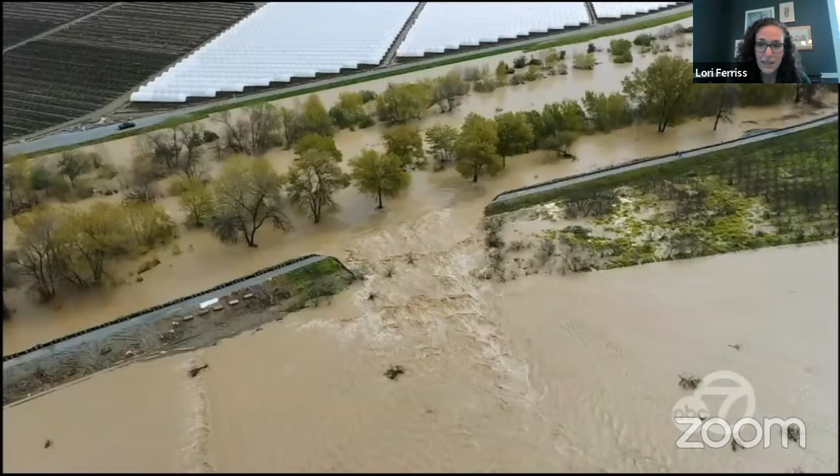We've used engineering solutions like levees, which we know have failed over and over again, leading to severe loss of life and property. But flooding, this relationship of living in a place with hurricanes, living in a place in the flood zone, adjacent to rivers, adjacent to the bayou, this was just part of life. And it was kind of an understood relationship with the culture, and the sense of place and the sense of identity was tied to the sense of the natural environment around you. And this is the architecture that came out of that relationship.

We traveled a lot, and I've always just been fascinated by the way that we build our spaces around us, and the way that these spaces that we construct talk about who the people were who built them, when they lived, what was available to them. So for example, Mesa Verde, a very different architecture from that of Louisiana, but understanding how the Native Americans there used the mountains and the cliffs and the earth around them to build these structures that have thermal mass and are protected from the heat and the sun of the desert.

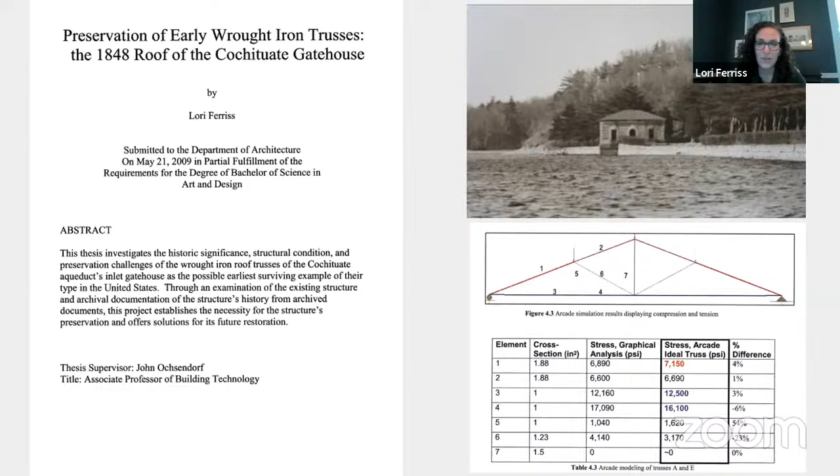So I went from my architecture degree into a master's of structural engineering, where ironically, I wrote my thesis about sustainability as a lead for historic preservation. So I got my engineering thesis done in my architecture degree. I came back and I really wanted to focus on inherently sustainable features and understanding how the way that the design industry of the time recognized sustainable design was sort of divergent from concepts of preservation, even though we know that preservation and most historical buildings, especially those constructed before the Industrial Revolution, are inherently better performing than most of what we build today.

So from there, I really wanted to focus on preservation and really just get my hands on old buildings and historically significant buildings. So I went to work for Silman, which is an amazing company. Bob Silman was truly a leader and, oh, my slides are auto advancing. At the vanguard of preservation engineering.

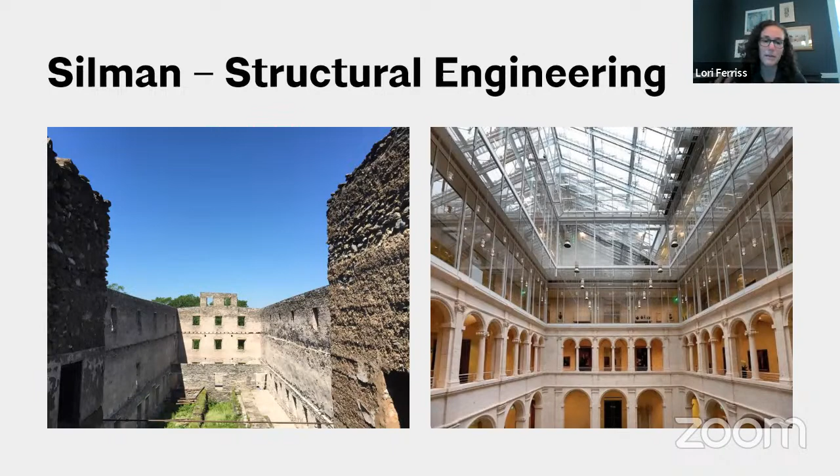So I got to work with structures like stabilizing the ruins at this Quaker barn on the left, all the way to really high touch buildings like the Renzo Piano renovation to the Harvard Art Museums, and understand how existing buildings perform, how historic materials perform, and how we can intervene to stabilize them, to modernize them, but really getting to understand what we already have.

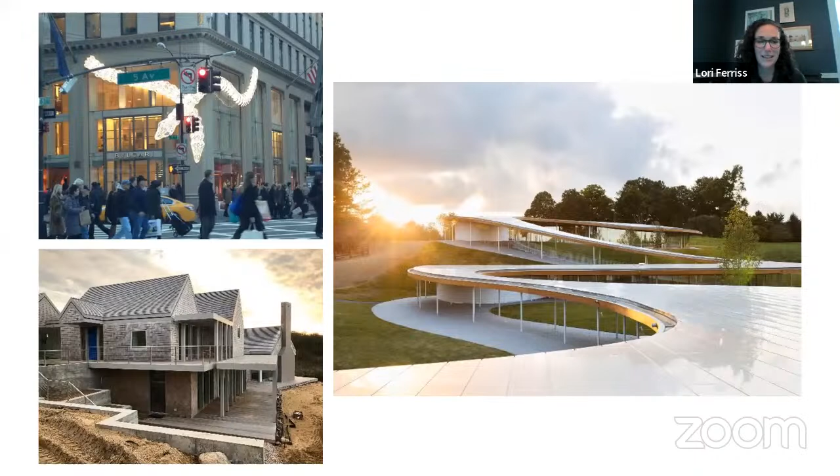I did a wide range of work at Silman, not just historic buildings, but also new construction like the Grace Farms complex by SANAA on the right. I did some high-end residential, which is totally different. And then things like, for example, these Christmas lights displays on historic facades in Manhattan. So I really had to experience quite a range.

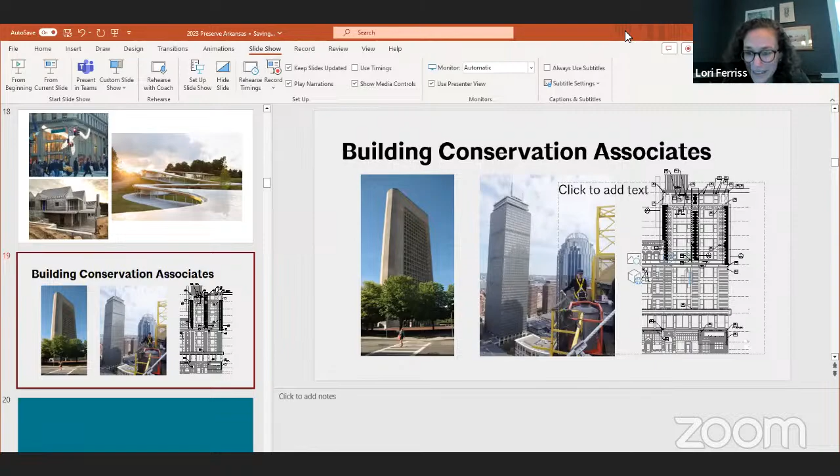Sorry, I'm gonna have to turn off my timings. Sorry about that. I don't know why that's happening. Okay, sorry. Back to the show.

So from Silman, as you saw, I was doing this wide range, and what I really, really wanted to do was preservation. I wanted to do all preservation. So I moved over to Building Conservation Associates, which does only that. They work on historic buildings, recommending treatments, recommending preservation approaches, guidelines, and really doing some innovative work. So in that job, I worked on things ranging from the Boston Custom House to this tower on the left, which is 177 Huntington Ave in Boston.

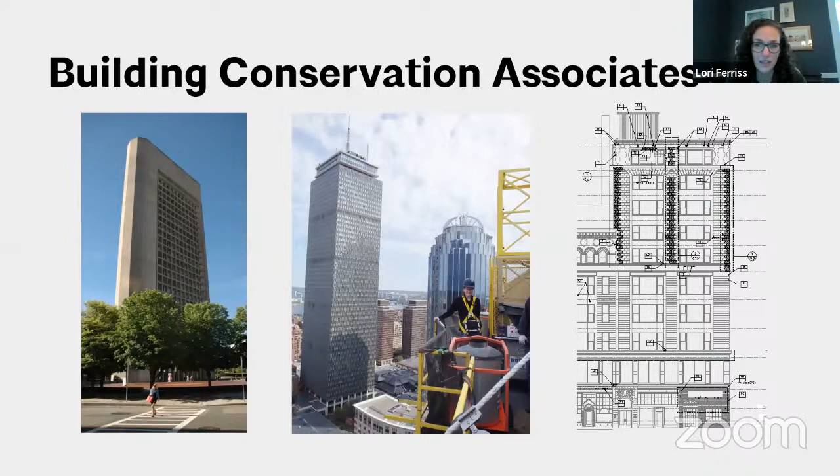It's the tower designed by I.M. Pei as part of the Christian Science Plaza here. In the middle, you can see me standing on the mast climber 300 feet up in the air. I'm really scared of heights. So it turns out that this was not the job for me, spending most of my time doing hands-on survey and hands-on construction monitoring on historic buildings. But I did get to experience a lot of the really important heritage that we have in Boston. And what I learned from this is that, well, I'm gonna get to that in a minute.

One project I worked on at Building Conservation Associates, the last big project that was really, I think, impactful to my direction, was a small consulting job to support the first Keeping History Above Water conference in Newport, Rhode Island. For those of you who aren't familiar with Keeping History Above Water, it's been an amazing effort that is all about rising sea levels, extreme rain events, and what that means for our built heritage.

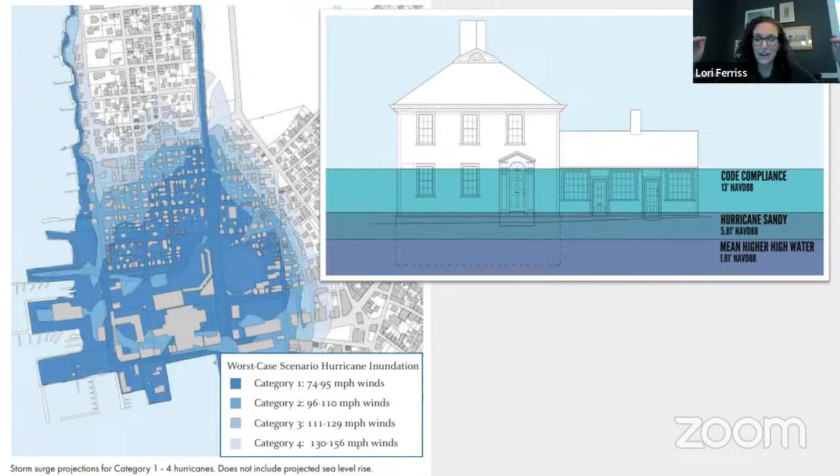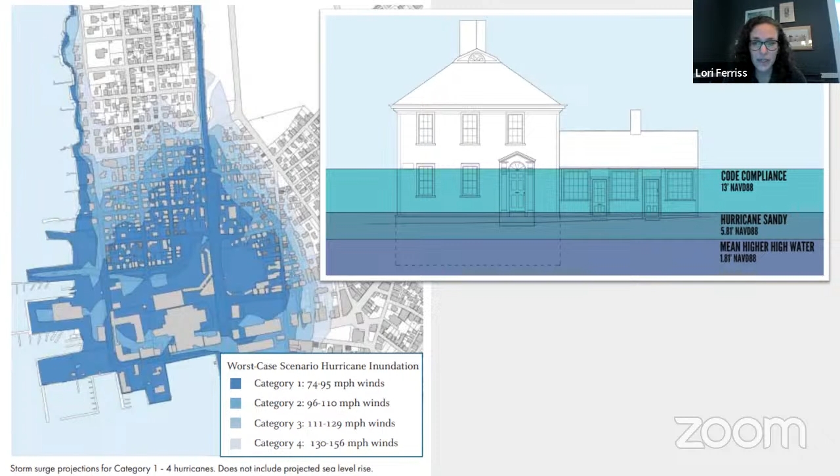And then code compliance, this 13-foot NAVD is FEMA's requirement. And so you can see that in order for this building to be FEMA compliant, you would have to elevate it almost an entire story. So this obviously raises huge preservation questions around authenticity and reversibility and how we address resilience in buildings like this.

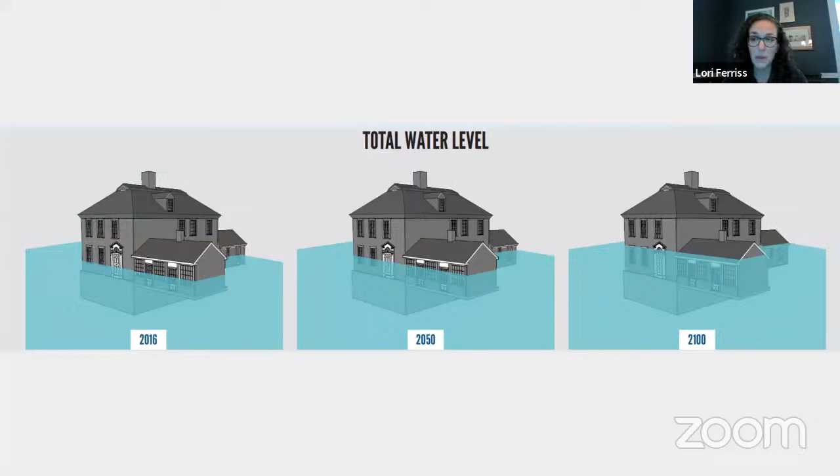So you can see that this is really a problem, that in order to preserve these buildings, they have to change. We can't think about preservation as just keeping them the way they were, because they will disappear if we do that. So we explored a number of approaches to flood proof, and really we were focused because of this uncertainty in the long term, and the fact that the building scale interventions really have to be paired with utility scale interventions. What's the city going to be doing about managing floodwaters? Are there going to be barriers? How are they going to make sure that water drains away from these streets, et cetera?

So we focused on near-term solutions that were appropriate, we felt, for the heritage, which included filling the basement, ventilating the crawl space so that you could have wet floodproofing so that water that came through could dry out without damaging the building. And in fact, wet floodproofing highlights the inherent resilience benefits of historic buildings, because these buildings were made with lime plaster and wood, wood that can absorb and dry out a few times without being too deteriorated. These materials are actually more resilient to flooding than what we would put in now, like drywall, which would have to be ripped out.

We did the basic easy things like grading, and we did talk about elevation because the wing, the kitchen addition to the house, which is not original, is even lower than the main house. So we talked about lifting that part of the house up because it was the most vulnerable.

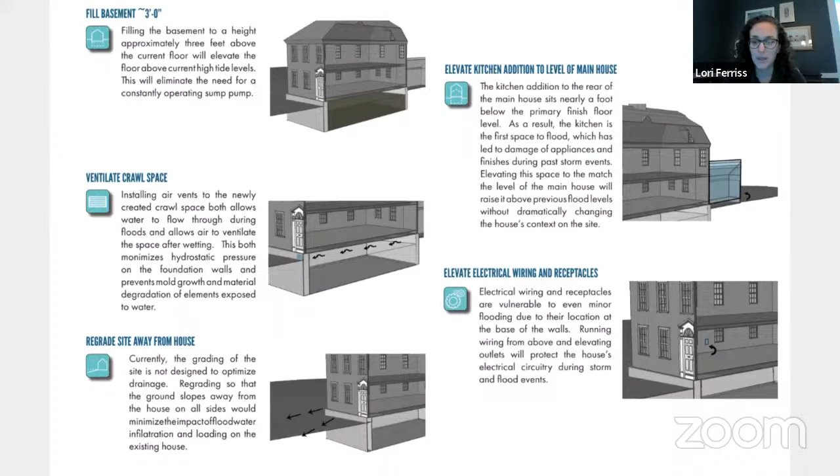And what we ended up doing was recommending this whole combination of strategies as a near-term, mostly reversible impact approach to the building. Elevation is a really dramatic intervention, and it's hard to know how to take a really big intervention when you don't know what the codes will be, what the projections will be for flooding. So we decided on a more minimal intervention to start with that will protect the building until there are more knowns at the municipal and the neighborhood scale and related to insurance.

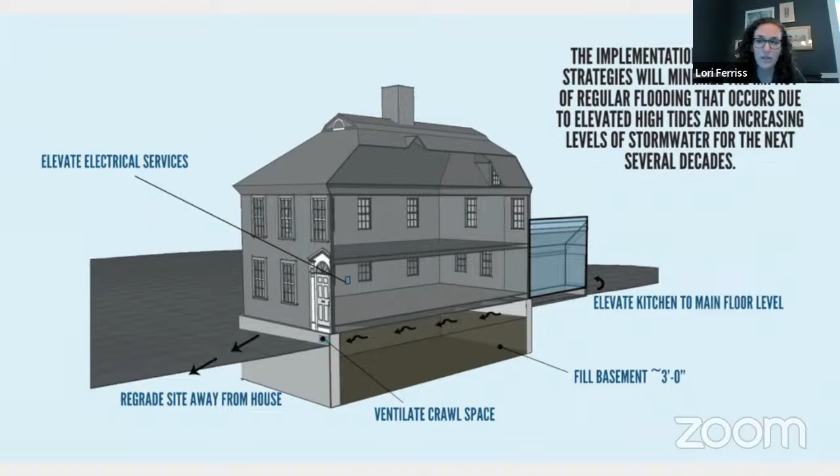So this project got me really excited about how our historic buildings are going to face the changing climate around us. And I realized that I wanted to do more of this. I didn't just want to conserve buildings. I really wanted to understand how we're going to use them in the future, how they're going to remain viable, how they're going to remain functional and durable. And so that brought me back to architecture, where I could really have a more holistic view of the work I was doing. And I came to Goody Clancy to work with Jean Carroon, who would be mortified to see her picture in my slides.

But Jean Carroon, for those of you who don't know, is a real pioneer of sustainable preservation. She wrote the book Sustainable Preservation, and has been at the forefront for decades, talking about how inherently sustainable our existing buildings are and how imperative it is that we reuse them.

So that was really exciting for me to just kind of experience a whole breadth of buildings, and not just how we preserve them, but why we preserve them and what's going in them and who's going to use them and how are they maintaining them and all these other questions.

So I'm going to pause here because what really motivated my next stage of growth was this concept that building reuse is climate action. I'm going to do a little technical diversion. I'll try not to be too nerdy about it.

But just to backtrack on this concept, going back to the Paris Agreement of 2015, the parties of the world agreed that in order to avert the worst of global warming, we needed to cap global temperature rise to somewhere between 1.5 and 2 degrees Celsius. So that was the commitment made at the Paris Agreement.

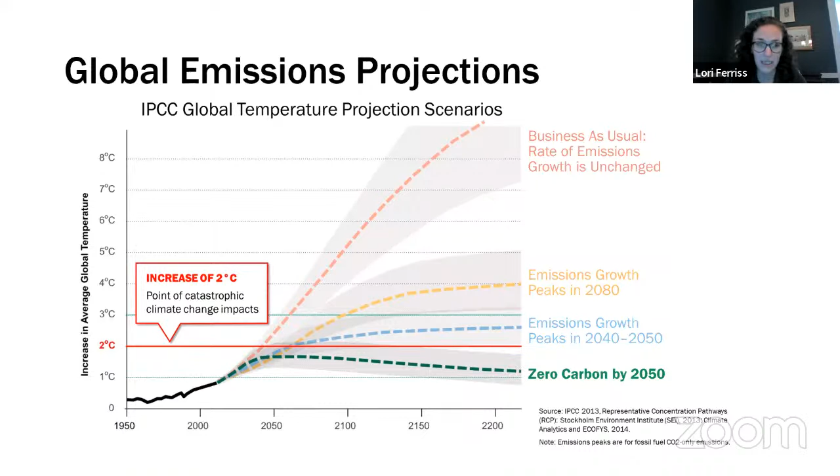And so when we think about what this means tactically, we have a carbon budget, and in order to meet that carbon budget, we need to reduce our emissions by at least 50 to 65% by the year 2030. So again, this is not looking at the lifespan of a building, it's looking at right now in the next decade. And we know that buildings are responsible for a huge percentage of emissions. Globally, that's about 40%. In urban areas like where I am in Boston, it's closer to 70% of our emissions coming from buildings.

But of those emissions from buildings, about 28% are from operating buildings. So this is heating, cooling, lighting, plug loads, whatever it takes to run a building. Those are the operational emissions. And these are coming from existing buildings that are using energy. The other 11% are what we call embodied carbon emissions.

And those embodied emissions are essentially environmental impact that results from extracting materials, mining them, bringing them to a manufacturing facility, processing them, transporting them to a construction site, and then building a building. And then what happens at the end of life is it's demolished and sent to a landfill. So this is the other 11%, and that's mostly new construction.

And so when we talk about reusing buildings and the positive impact that can have, it's really a double whammy, because we can both reduce the operational emissions by making buildings more efficient, and we can reduce the embodied emissions by avoiding all the material that goes into new construction.

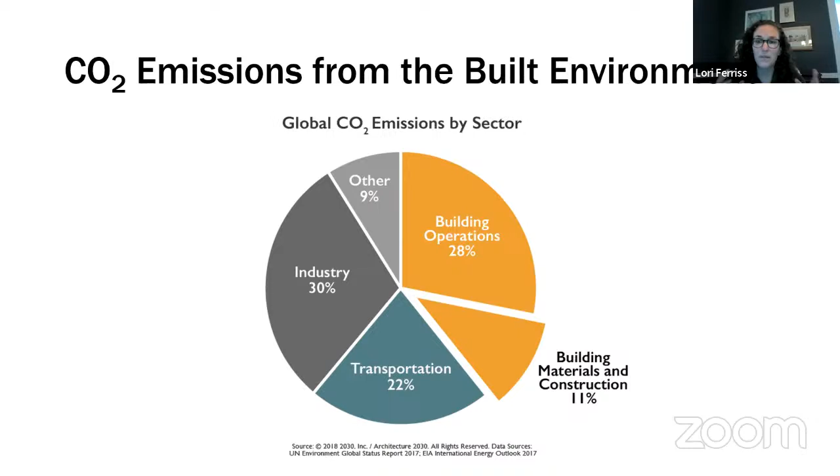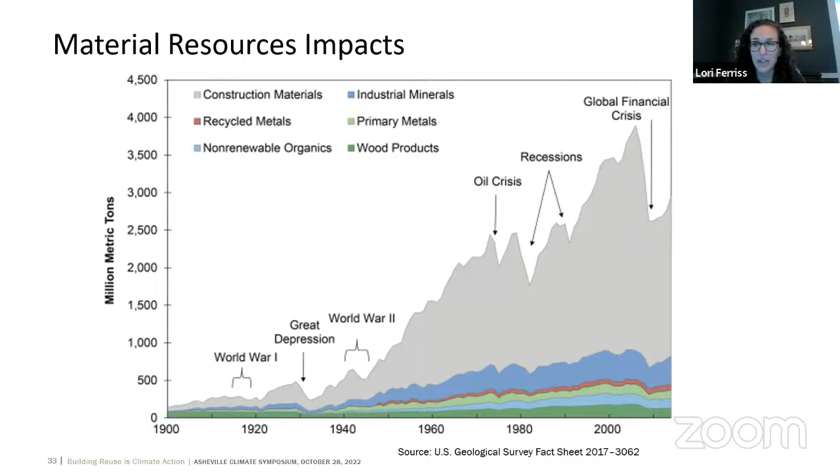And I'm going to talk a lot about carbon because it's the metric that people typically use, but there are obviously many, many impacts to material use. For example, material resource extraction is the primary cause of biodiversity loss. And here in the United States, 75% of our raw material extraction feeds the construction industry. So it's really non-negligible.

And we also know, as we saw from 74 Bridge Street, and as we see all around us, that with our heritage, it's not just what benefit can our heritage offer in terms of climate mitigation, but it's also how vulnerable is our built heritage. We know that we're already losing historic places to climate change now.

So the way that climate change is addressed is through climate action. And the term climate action officially, according to the UN, has 3 prongs. It means mitigating environmental impacts, so reducing our footprint on the environment; adapting to our environmental changes, becoming more resilient; and thirdly, building knowledge and capacity around climate change so that everyone is able to do steps 1 and 2.

And we know that existing buildings have a huge role to play in this. Just between now and 2060, the world is projected to double our existing building stock, which is essentially building a Manhattan every month between now and 2060, which is sort of horrifying. Most of that's going to happen in the global south.

But we also know that by retrofitting existing buildings, we can reduce the embodied carbon of construction by 70 to 85%. So this is a real opportunity for advocacy and a real opportunity for existing buildings to contribute positively. And of course, because this is a preservation group, we know it's by no means just about carbon, that the real benefits are in the co-benefits of existing building reuse and heritage reuse.

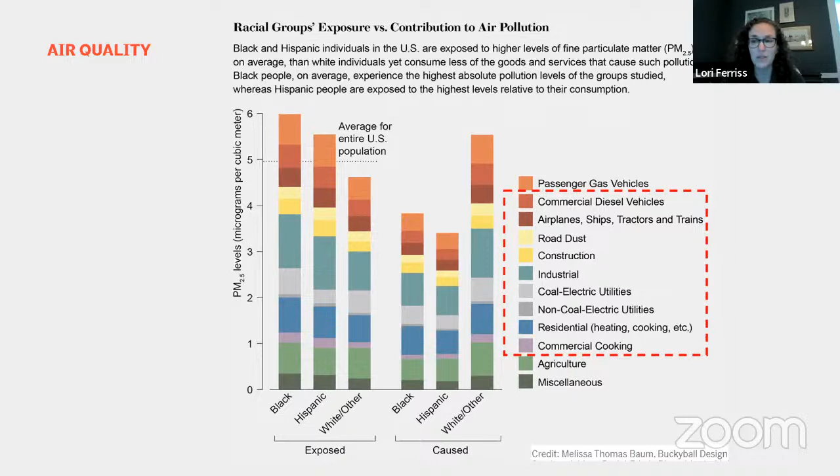So again, our work as preservationists, as architects, whatever way you work in buildings, has a huge impact on the communities and people all the way up the supply chain, whether you see that directly in your project or not. We also know that demolition is really bad for people in low-income communities. That's where the landfill goes, and that's where the air pollution is going to happen. And so we have to, again, think about retaining buildings as a way to support and make healthier some of the most vulnerable communities.

We also know that preservation results in more jobs than demolition and new construction. There are some really great facts from the PlaceEconomics reports. This one, for example, that reuse and refurbishment produces 300 jobs per 10,000 tons of waste, compared to only 1 to 6 jobs in a traditional landfilling and incineration process. So this is really good, not just for the environment and for culture, but also for local economy.

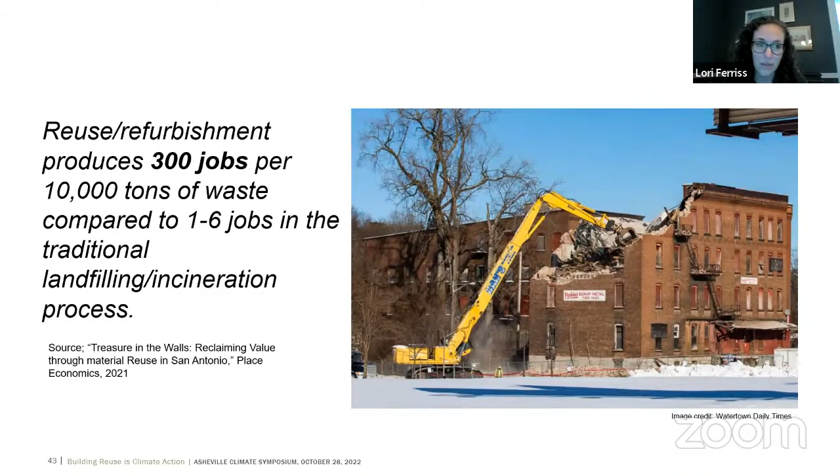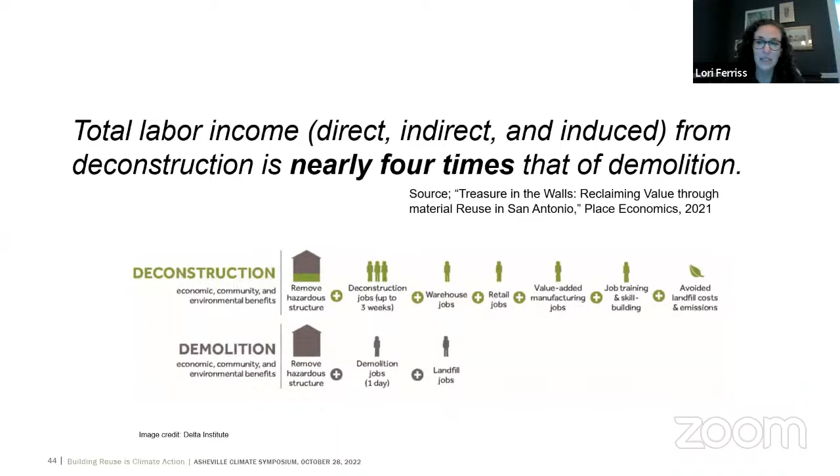Similarly, total labor income from deconstruction is nearly 4 times that of demolition. So again, when you study it, it's shown over and over that reusing existing buildings, restoring them, salvaging historic materials is better for the economy, and especially better for the local scaled economy.

And again, I think there's often a perception, at least in Boston where I am, I know in many urban environments, that preservation is sort of an elite concept and that only wealthy people benefit from historic buildings and that that's who they're for, but that's in fact not true at all. And if we look in Boston, you can see on the left our vulnerability mapping based on race and income and age and language availability, et cetera. And on the right, you see the historic districts, and you see the almost direct correlation between the two.

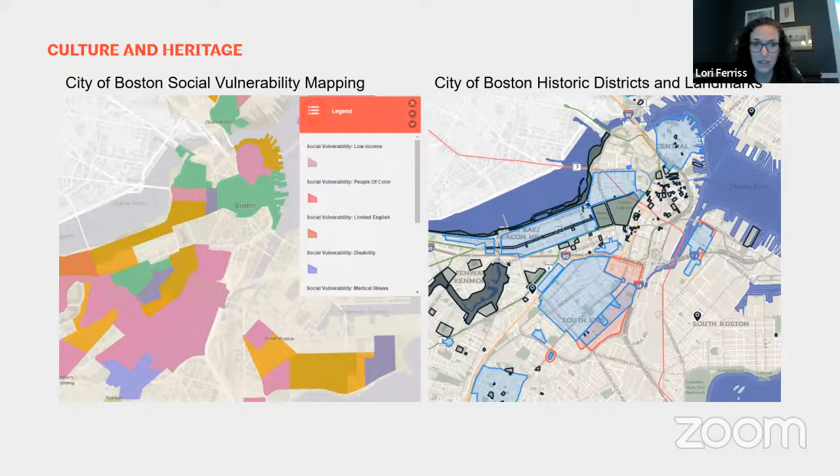So really preserving and taking care of, stewarding historic places is social justice and does promote social equity. And again, going back to this idea of loss and resilience, we know that we're already losing a lot of land, of buildings, of places, and the people on the front lines tend to be more vulnerable communities. And so that is where we need to figure this out. We need to figure it out for those people, and because it's really coming everywhere.

So with that, in order to really think about how I could help make this argument of how important existing buildings are, I started implementing life cycle assessment in my work. So I first did this in graduate school, but I came back to it when I went to Goody Clancy to be an architect.

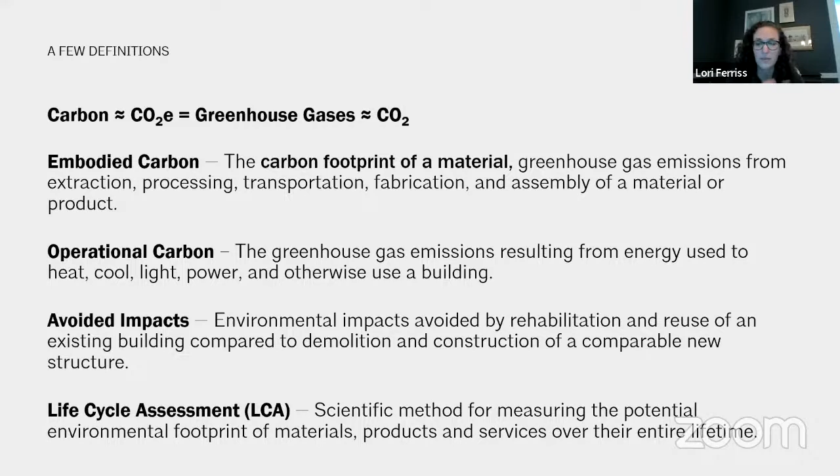And just to make sure we're all speaking the same language here, a few words of terminology. So embodied carbon, again, is that footprint of material manufacturing, transportation, et cetera. Operational carbon is the energy we use to operate buildings. Avoided impacts are the environmental impacts that we avoid by reuse compared to new construction. And then life cycle assessment is a scientific methodology that measures the footprint of materials from cradle to grave over their entire life.

So I wanted to apply this to preservation projects, both for decision-making and to really advocate for building reuse. So for example, this is a campus building I worked on, it was a study where we were looking at exterior restoration and systems upgrades and envelope upgrades. And so I wanted to understand, is spray foaming this building really the best thing to do for it?

So, we looked at insulation options, and this is where I started to look at this concept of carbon payback, which is if you have to spend a certain amount of embodied carbon in order to make a building more efficient, when does that investment pay off? If you think about it in financial terms, when does that upfront environmental investment pay back over time?

So in this case, we looked at an insulated exterior render. We looked at filling the cavity with cellulose, which actually stores carbon because it's made of a biogenic material, or filling the cavity with spray foam. What we found is that the carbon payback was pretty good for every scenario, because we're in New England and this building was uninsulated. Any insulation was very good.

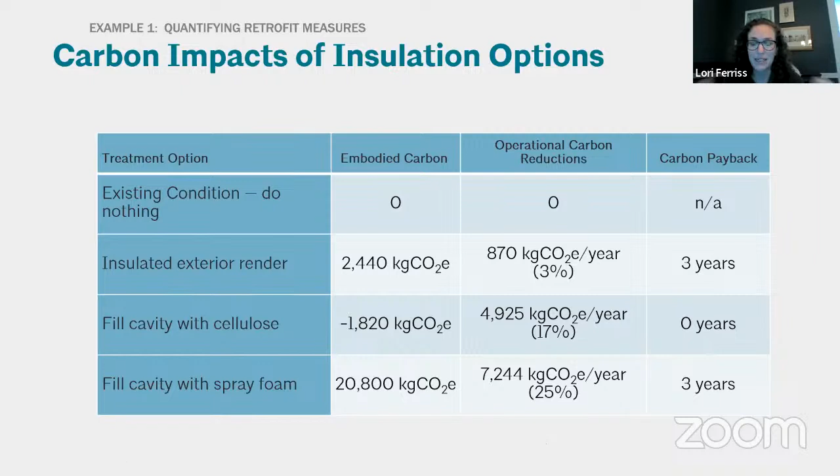But what we see is this pretty big difference in embodied carbon, and especially with cellulose, where we can actually store carbon. We can draw down carbon from the atmosphere and stick it in the building and keep it there by using natural materials. So that was a big lesson for me.

How much time do I have? All right.

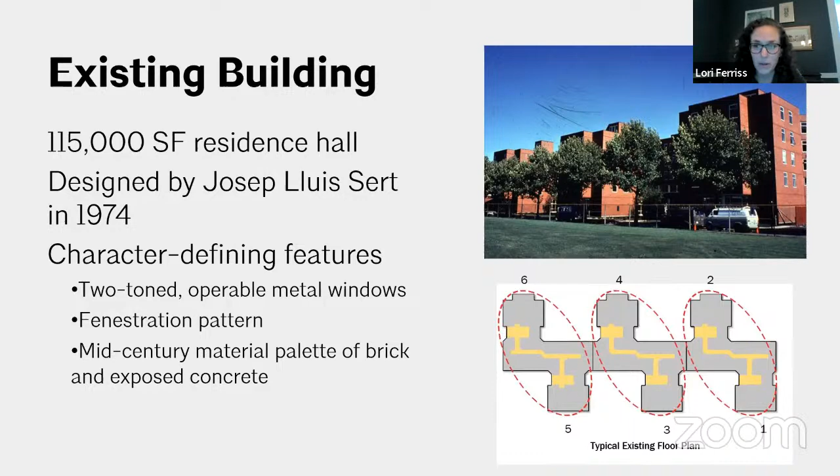I then wanted to bring this up to the whole building scale. So this is a much more modern, mid-century historic building, a residence hall designed by Sert, who was a pretty significant mid-century architect in my region. He led the Harvard Graduate School of Design for a while. And so this is a very typical architectural character for his style.

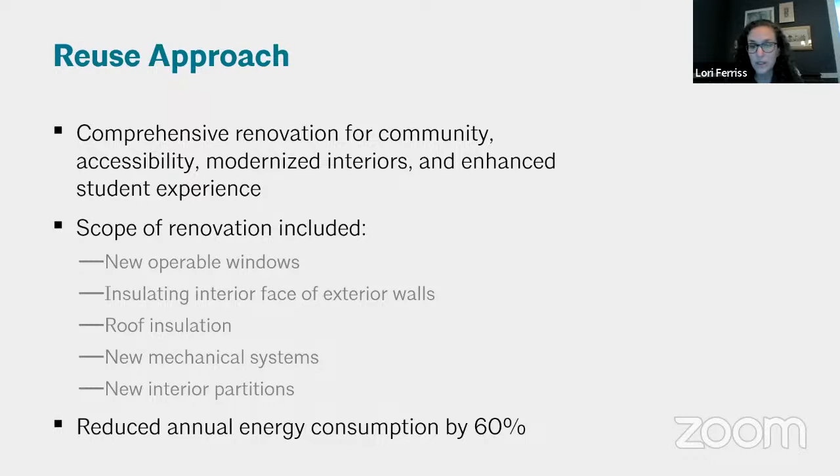And so the reuse approach for this building was a comprehensive interior renovation and modernization. We replaced all of the windows to match the historic windows. We insulated the exterior walls on the interior face, we insulated the roofs, and we put in all new systems. So we were able to reduce the energy consumption by about 60% from pre-renovation. This also included, obviously, an architectural transformation to really make sure that this building was serving the next 50 years of students.

And what I did on this was the first whole building reuse project for which I completed a whole building LCA. So this is an accounting of all of the material that we added into this building as part of the renovation, how much carbon dioxide equivalents embodied carbon resulted from that renovation. So I used a plugin to Revit called Tally and found that the entire renovation had a carbon footprint of about 780,000 kilograms of carbon dioxide.

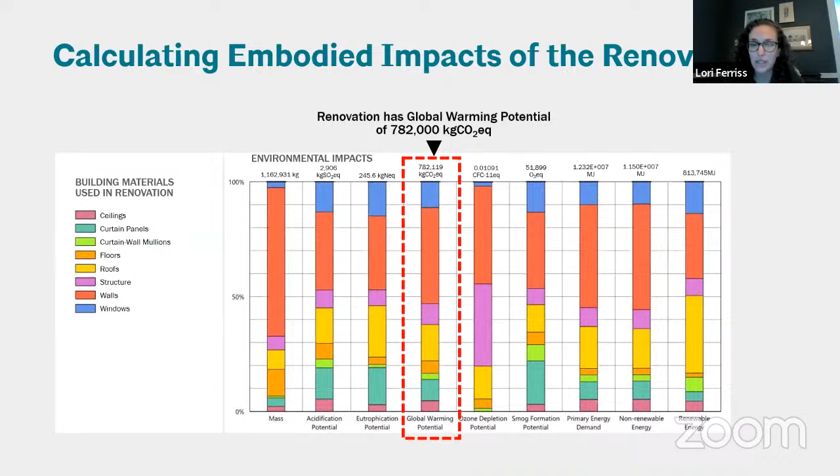And if we just look at carbon, the avoided emissions from just reusing the single building are equivalent to growing 133,000 tree seedlings for a decade, or avoiding 13 million miles driven by a passenger vehicle. So this is a pretty big number. And we also know, going back to that time value concept, that we have to reduce emissions in the near term, that one of the most important things about reusing buildings is that it reduces emissions right now in year

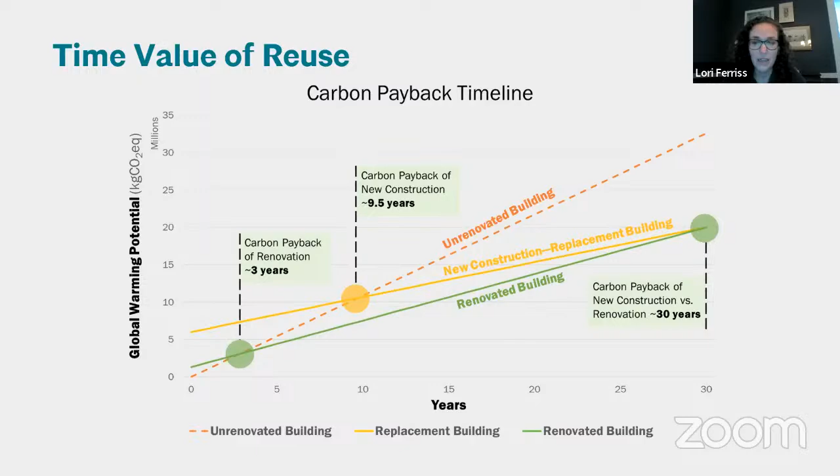You can see that the replacement has a much higher embodied carbon at year zero. It starts at a much higher point. And I gave it an additional boost of 15% energy efficiency just to see what happens. And you can see that even with that lower slope, it takes 30 years for the new construction to make carbon sense compared to that renovation. So that's too late. When we think about that timeline, it's already too late. So that's whole building LCA.

That's pretty technical. I'm going to zoom back out, give your brain some space, and talk about some of the work I do outside of my job, because I think for me, I found that this is really where I'm able to connect with my people and get work done that I think reaches more people, more buildings, and has a bigger impact than everything I'm able to do on a day-to-day. So I'm a co-chair of the APT Technical Committee on Sustainable Preservation. If you're part of APT, I highly recommend joining our community. People are doing really interesting work at this intersection between sustainability and climate and preservation.

Based on my participation in the TCSP, I'm one of the founding members of the Zero Net Carbon Collaboration for Historic and Existing Buildings, or the ZNCC. This is also a really great group. The website is znccollaboration.org. And this group is interesting because it's not just preservationists. It's a coalition of organizations, including the American Institute of Architects and Architecture 2030 and APT and ICOMOS and the RAIC and the Carbon Leadership Forum and many others who have really come together to talk cross-sectorally around this issue of leveraging the existing and historic built environment.

And that all kind of led me to the Climate Heritage Network, which is global. I'm kind of working my way out here. This is a global network at the UN level of organizations all over the world, nonprofits, public sector organizations and ministries, as well as NGOs, universities, et cetera, who are committed to mobilizing arts, culture, and heritage towards climate action. So this is the group that has allowed me to speak at venues like COP.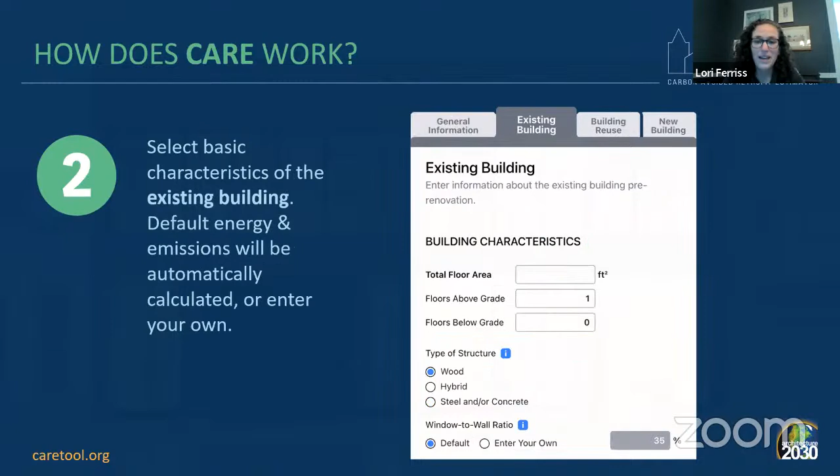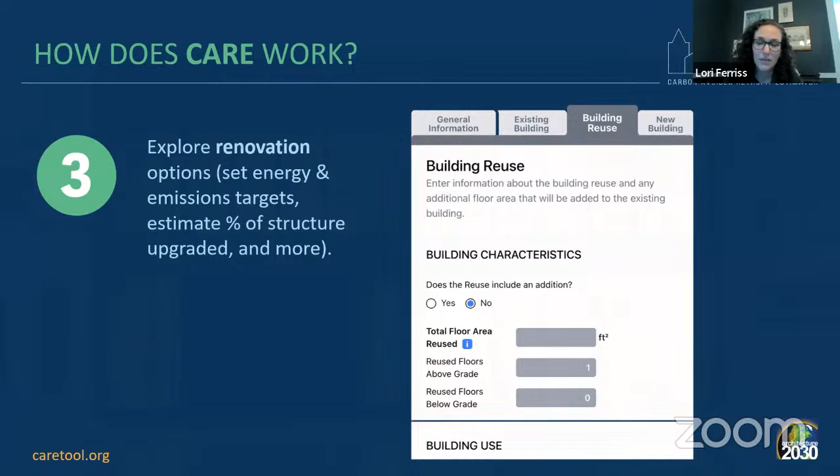And the way it works is you put in some general information about your building, you define the existing building, how big is it, what's its structural typology, et cetera. You input some factors about reuse, how energy efficient is it going to be, and how are you treating the mechanical systems, the structural systems, the envelope, and the interiors, and then what would you be replacing it with for new construction. And essentially you get two charts, one that looks at total carbon for a duration that you set, and then the other looks at those emissions over time, similar to the graph that I showed earlier. So you can say how long you want this analysis time span to be.

I'm just going to click through this quickly. It shows you the embodied and operational emissions for each scenario. And then it shows you how those play out over time so that you can make informed choices about when it makes carbon sense to reuse a building and how to reuse it. How energy efficient should it be? How does the grid impact it? A lot of different questions that we have about reuse.

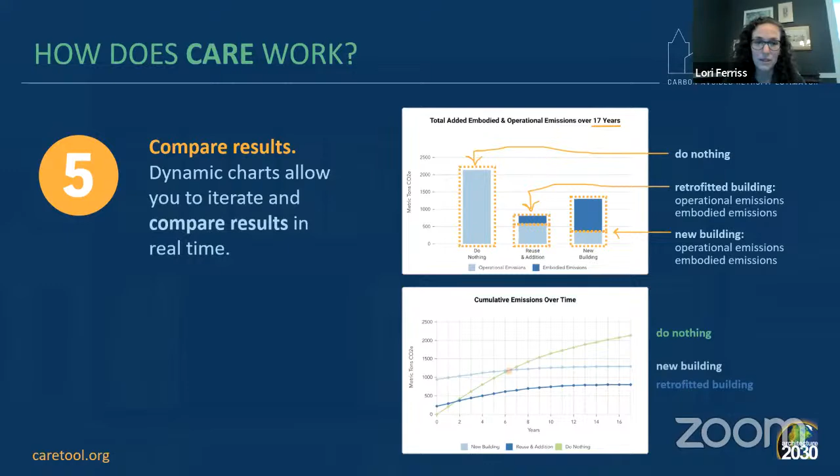So these are some of the questions it can help you answer, that simple question, how much carbon can you avoid by reusing a building? It can help you explore some of the factors that may influence that. What if you can only reduce operational emissions by 50% or by 20%? What if you're in a place with very dirty electricity? Or what if the existing building is falling down and you have to build an entire new structural system? So you can really explore all of these variables.

And you can also use it to help demonstrate the importance of building reuse in climate. For example, if you're in a municipality that has carbon neutrality targets, or you're working for a higher education institution that says, I'm going to be net zero by the year 2050. You can use this tool to say, well, reusing this building is going to get you this far towards your goal. That is not decision-making information that most people have at their hands at this moment.

So I was going to do a quick case. I'm going to breeze through this. This is my last case study, but this is a research project that I did with Agnes Scott College to use the CARE tool to look at a whole campus. So not just building by building, but really looking at historic campuses. So Agnes Scott is in a historic district outside of Atlanta, Georgia. It's a really architecturally diverse campus. And its historic buildings are really, I think, not surprisingly, fundamental to the identity of the campus and to the sense of loyalty and the sense of belonging that the students and the alumni have.

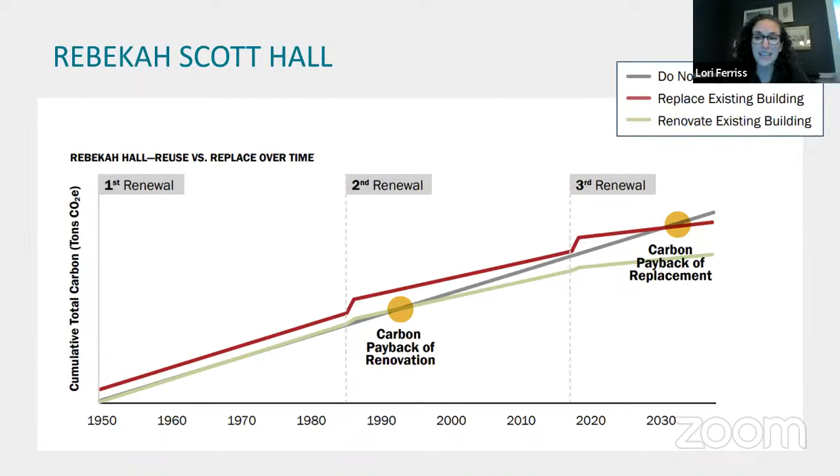And so on a typical higher education campus, that cycle is about every 40 to 50 years. So looking at one building here, you can see how that decision to renew or replace happens. In this case, they've renewed this building 3 times. And you can see the carbon savings in green of reusing compared to replacing that grows and grows the more cycles through which you choose to reinvest.

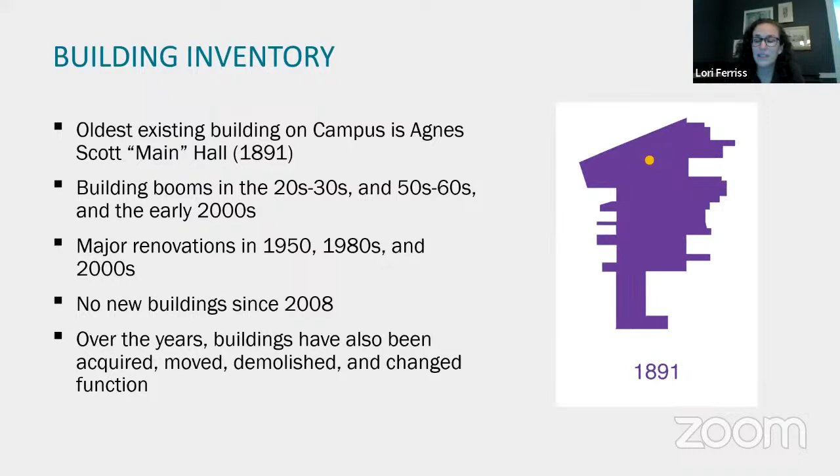So they have a pretty large range of buildings on campus, but they've mostly been built in different booms of construction in the 20s and the 50s and in the early 2000s. But they've really focused on reuse, repurposing, adaptive reuse, moving buildings. Essentially, they've reinvested rather than replaced while they've grown.

And so what this analysis was able to show is that this avoided carbon emissions equal to 34,000 metric tons historically. And if you planted their entire Arboretum campus with seedlings, it would take the entire campus 400 years to sequester that much carbon dioxide. So this is really a non-negligible number.

And then when we look at moving forward, in 2007, they committed to be carbon neutral by 2037. So if we look at just this period of 30 years, they gave themselves 3 decades essentially to get from business as usual to carbon neutral. And if we look at 3 scenarios, the first, where you just tear down every existing building and replace it with near net zero construction.

In fact, that only reduces your carbon emissions by 3% during these 3 decades because the embodied carbon is so high. So that's almost a wash, as opposed to this brighter green color, which is both reusing buildings and also renovating and retrofitting them. For example, installing LED light bulbs, retro-commissioning HVAC systems and working with occupants to really change their behavior to use less energy. This results in a saving of 41%.

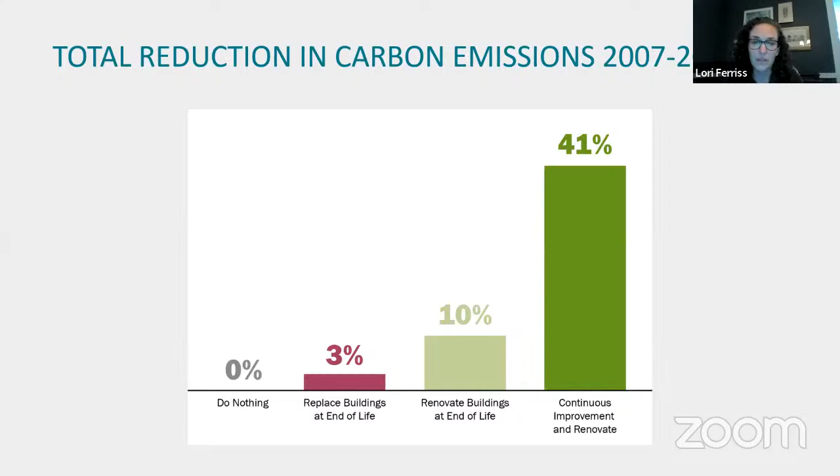So it's really clear that in order to meet their carbon neutrality goals, building reuse must be an important strategy. And so they've taken this and been able to use it to help fundraise, to help promote their historic buildings, not just from a heritage and a cultural standpoint, but also as part of their environmental and resilience goals. So that was an exciting one.

So I'm going to leave it with what I'm doing now. I'm at Northeastern experimenting with teaching and research and really just taking a break from practice and thinking a little bit more freely. I'm also consulting with the Cameron MacAllister Group, which is more business consulting. So helping firms not think about how to make sustainable buildings, but how to arrange their practice in a way that fosters sustainability and fosters equity and inclusiveness within their firm, thinking about strategic planning and how this can all be organizationally implemented.

I'm doing obviously more work on the CARE tool, and I've also been enjoying just experimenting and exploring all of the opportunities. So for example, I'm working on a grant in the Boston area that's trying to figure out how to decarbonize our supply chain around concrete, which is one of the biggest emitters. So really just trying out all of these opportunities that are available.

So I just want to end by coming back to my roots here and historic buildings. And I think if there's one thing to take away, it's really just that these buildings and the knowledge within them and the connection they make us feel to place is so important. And when we look at how we can both preserve them and also learn from them and infuse that into new construction and really reflect sense of place, sense of environment and vernacular knowledge, I see a lot of hope for the future of the built environment. So I'm going to end there.